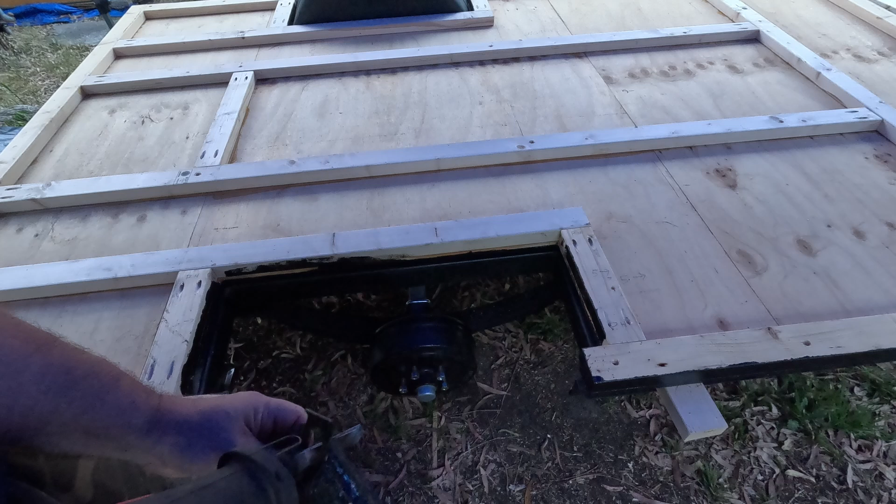Might not be as easy. Yeah, I really don't need these to be waterproof anyway. I don't need to totally seal them up because I'm building a box around them and the inside of the box is going to be waterproof.

And I have allowed for 270, which is well above the wheel well, so it should fit together nicely. Also, I marked on this bit of wood how high the wheel is once it's in, and we know it fits in that hole, so that's definitely big enough to be fitting in there.

And yeah, pretty much once it's all buttoned up, I should be able to fix those seams there, and water should stop getting in anyway, so that'll be good. It'll be awesome. Oh, it's getting windy and the storm's brewing up.

Did what I wanted to do, and that's all I wanted to do, was just get those wheel wells on and just have a look at it, get the base flipped while there's someone else around to help me, so I wasn't scratching the crap out of it while I was trying to get it up there.

Yeah, so up until now I haven't really thought about how all this stuff goes together, so I did quite a bit of design work last night, and I might take you through it now.

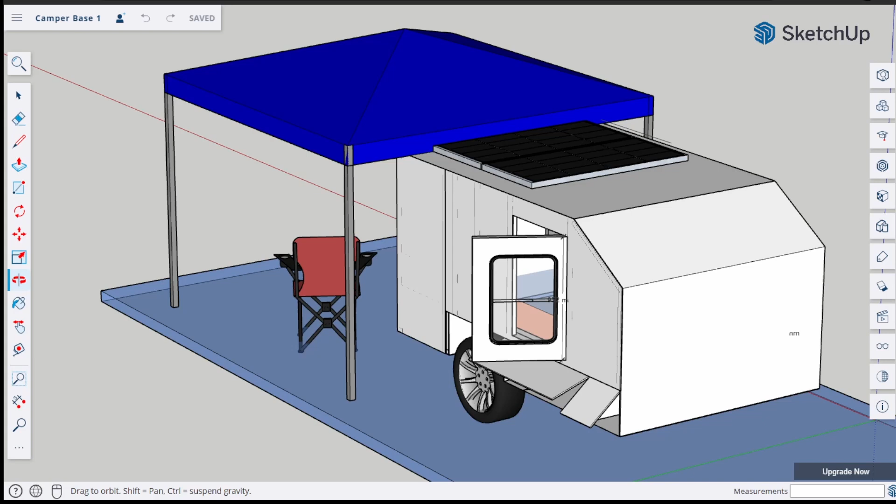So here's the sort of first concept drawing I came up with. It's your typical square drop shape with solar panels on the roof and a window in the door, and a bit of storage underneath. I just really wanted to work out what I wanted in a camper and how it all fit in there, so the whole pass-through on this area here, and also the storage underneath. It should all look familiar from everything I've done so far.

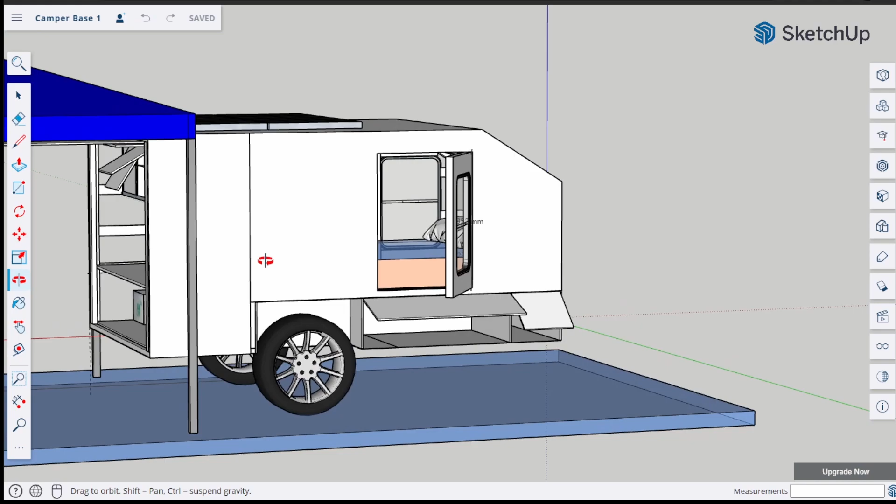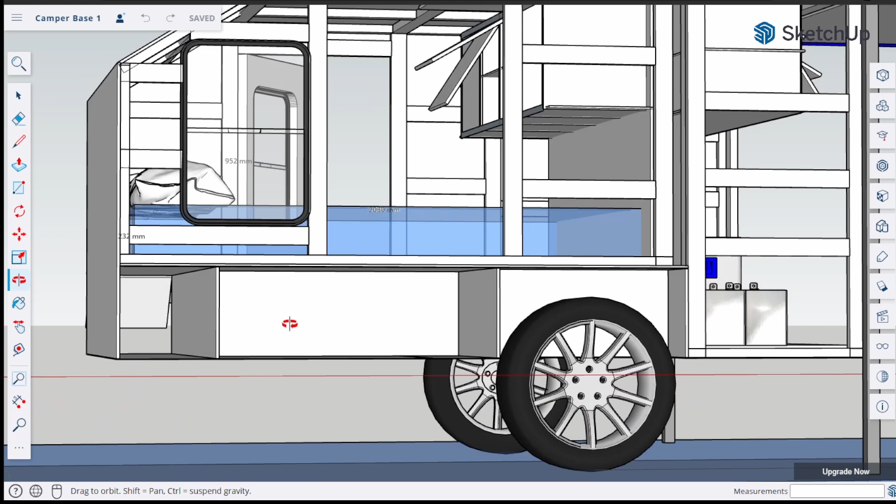Also, the rear area with the fridge and batteries - I don't really know where I'm going to put everything, some cabinetry, that sort of thing. It's some really minor detail of how all the framing is going to go together, but you can see that underneath it's plywood. There's no actual structure under there, no rigidity, no thought of how it's all going to go together - it's just a concept.

So here is the more detailed framing. As you can see, there's a lot more involved than what I had before, but it's still all the same elements, really.

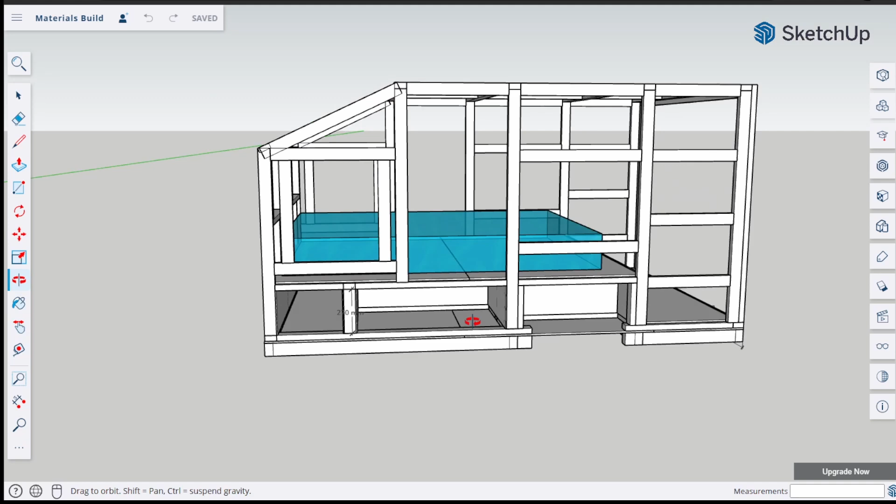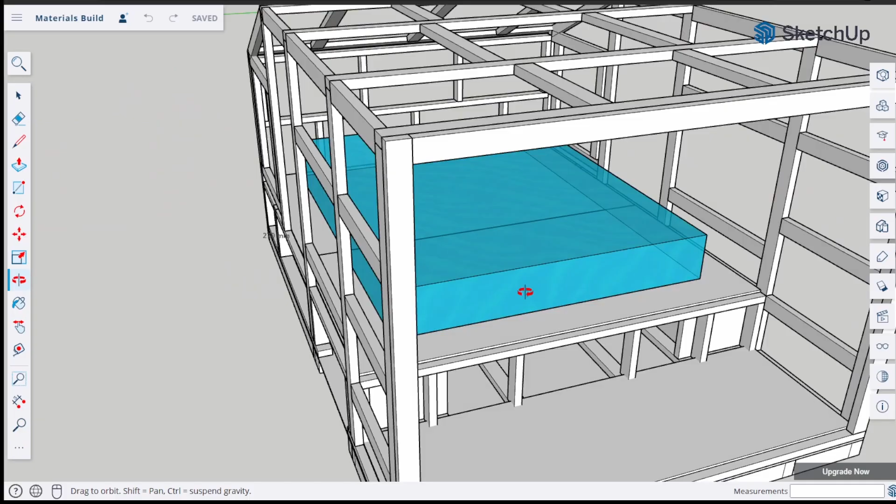So the pass through here, the storage area underneath, the wheel wells, and the kitchen area at the back. You can actually see from this view how much storage there will be underneath - how much of that is going to be accessible with the fridge in the way, I don't know, but we'll work it out. And the scale of the interior with the bed there, you can see how much room there's going to be.

So I'm still working on the finer details of the inside, but as for putting the structure together, this is what I've come up with.

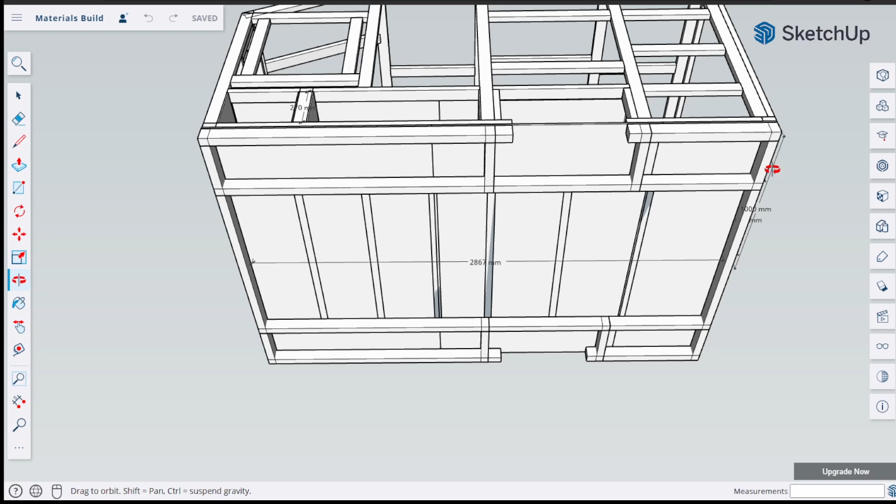I started by modelling the complete frame of the trailer underneath. So that's the trailer, and then the thin line there is the plywood that's on there, and you should see the familiar rails that I put on there.

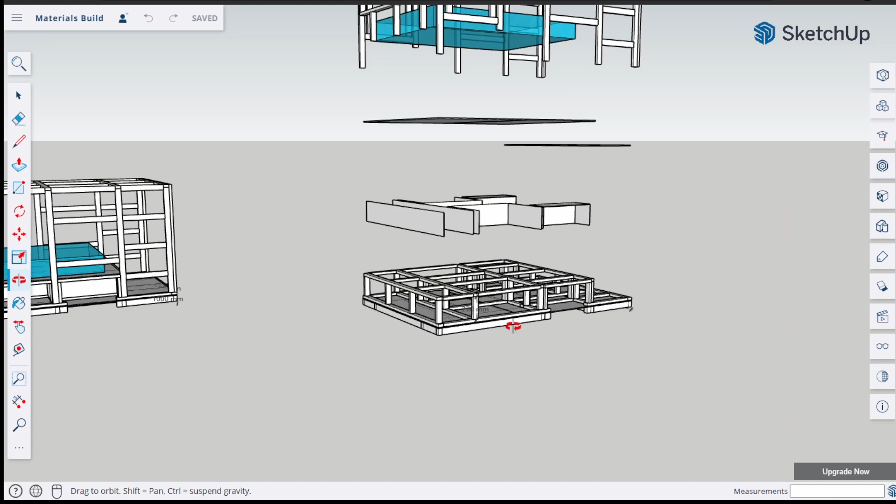So from that I expanded it just a little bit so we can see it in more detail. This is sort of what I came up with, and I don't know if it's overkill, but I do want it to be solid because I want it to last for a long time and not shake itself apart when I'm driving down the road.

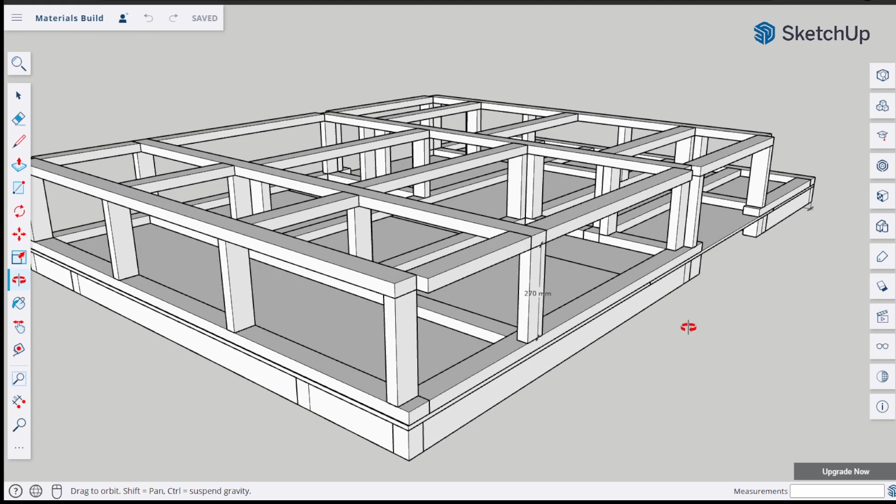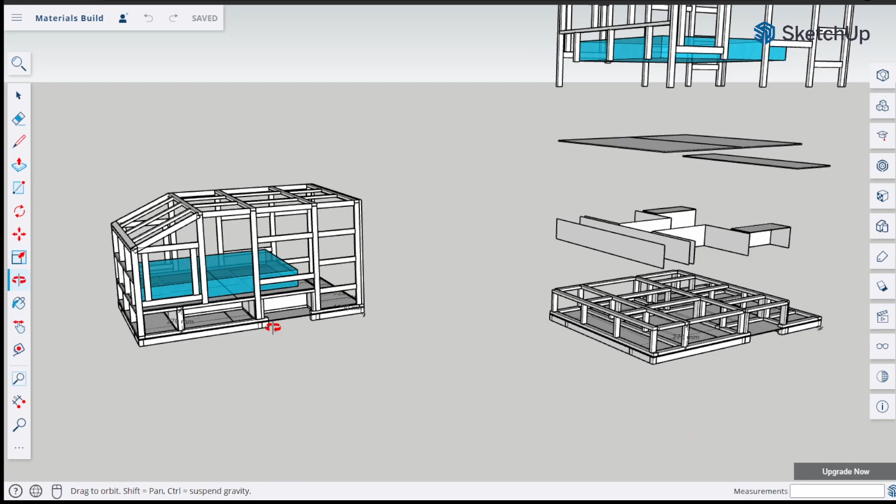What you might notice here is these uprights are missing here, also here, and at the back. Because what I was actually planning on doing is, in the top part of it, having the uprights for the most part running all the way down to the floor and attached, so that all of the structure that's built will be solid and together, if that makes any sense.

This is a materials breakdown of what I'm going to be using, and sort of a map. Not 100% sure yet how it's all going to go together, but sort of a map of how things will connect together.

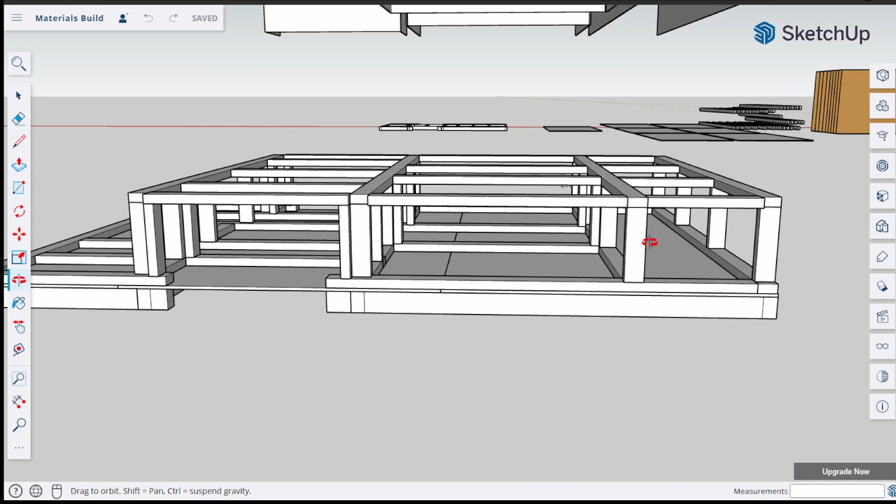So this is what I'm going to be working off, and you can see right here that 270 upright is what I've been working off between the top and bottom of the storage area. So that's what we got.

I've actually got a plan. So I'm going to probably start cutting all the bits of wood for it, and then laying it all out, mocking it all up first, making sure I've got the right amount of wood, because once I start building this thing I'm not going to have the trailer to go and get the wood with, unfortunately. Maybe it'll fit my car - I have to test that. That's what I was going to do, I'm going to do that now.

Technically it fits in my car. Might be a problem with it sliding forward and hitting the windscreen. So yeah, next video is going to be cutting up all the wood to build the storage area and the bed base.

It's going to get confusing, but I'm going to power through it. It's going to work. It's going to be fine. It's going to be good. It'll be alright, I hope. Maybe.

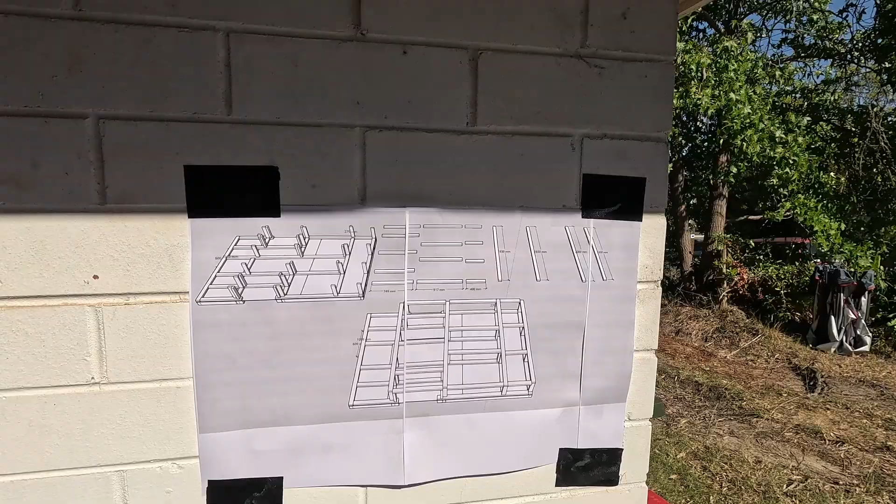So it's now Saturday morning, bright and early, and we're going to start cutting some wood to get all this done. I did make a cut list, so let's have a look at that real quick. I do have a plan here with some measurements on it, which I'm going to use. First of all, I'm going to get a tape measure and just double check that the measurements correspond to this, and then I'm just going to get cutting.

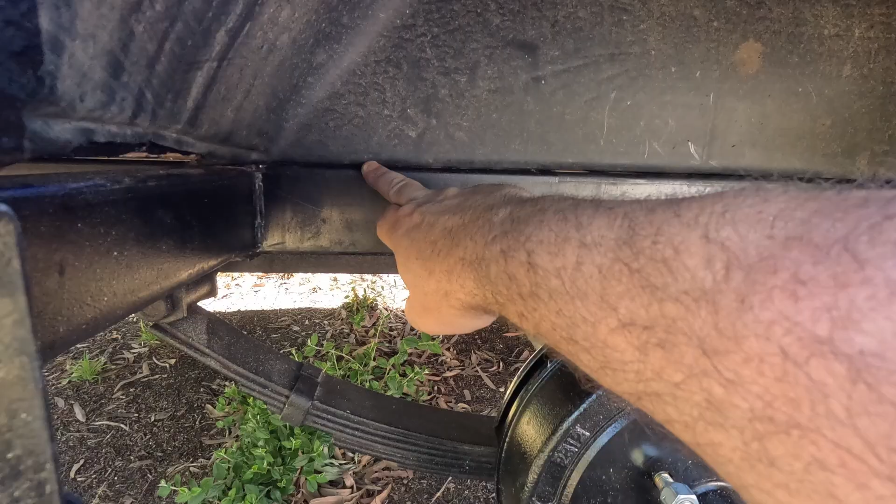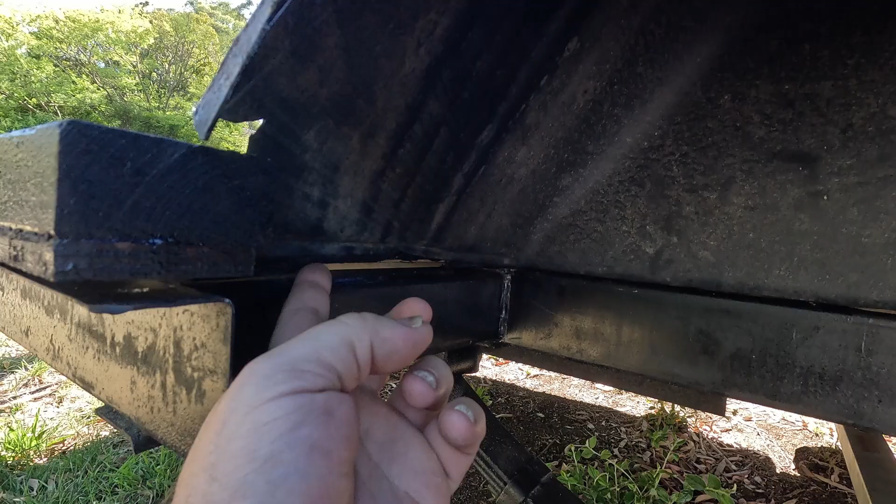Also, I have totally changed my mind on these guards. The lip is actually causing quite a bit of gap, and I'm worried that it's going to throw all the measurements out. So I'm going to be taking it off, and all these parts that are supposed to be going under between the frame and the ply, I'm going to bend down and actually mount along the frame on the inside of the wheel well. So the base will actually fit flat, because as you can see here, it's creating quite a gap, and I think I should have tried to avoid that at all costs. Also trying to work out a way to make repeatable cuts.

And I think that ought to do it. That's actually, yeah, something like that anyway. So having never done this before, I'm actually thinking the best way to do it would be...

...to cut the long bits first and then use the offcuts, graduating down to the smallest. Because in my mind, if I just get one bit and cut it up into lots of little sections, I'm just going to be wasting wood. I should be using offcuts.

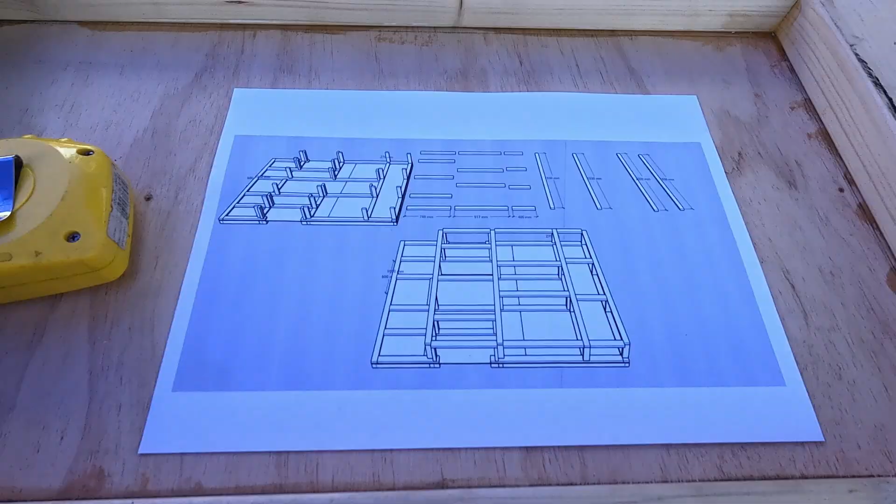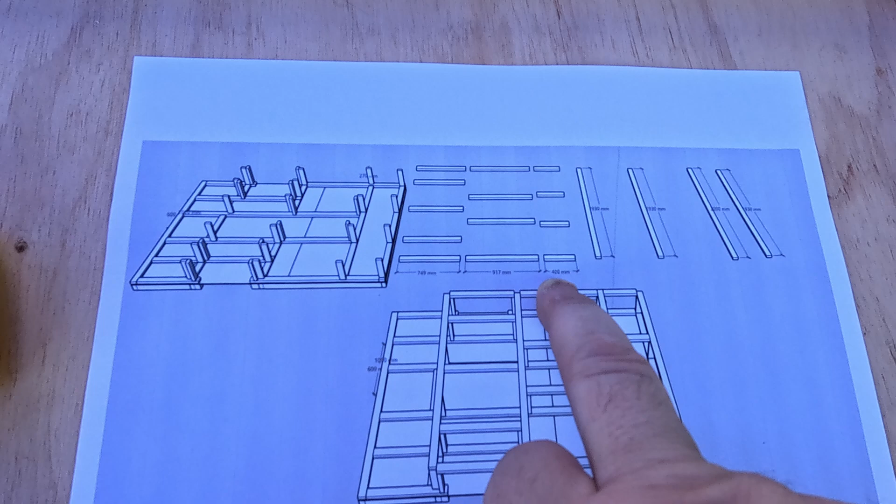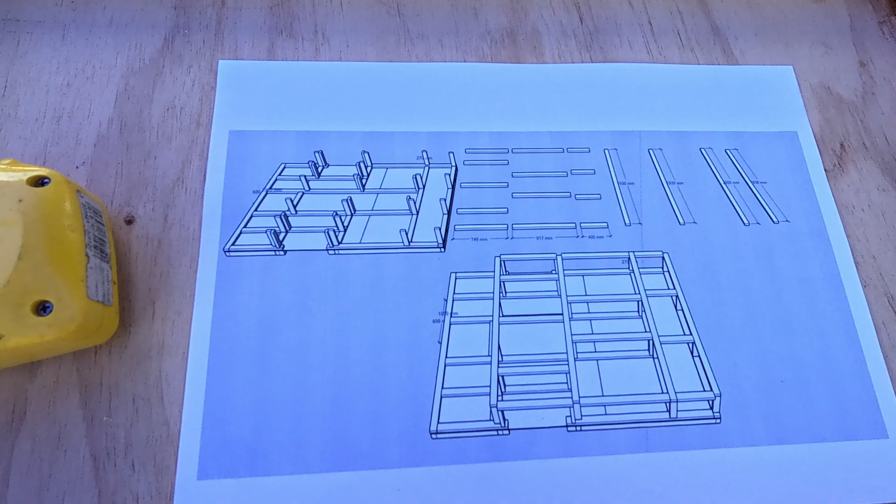So I think the way it works in my mind is if I cut all the large ones, they're 1930, it's a 2000, 1930. If I cut all those and then start doing the ones that go along, because I think they're less than, we've got 1, 2, maybe 2.2 meters or so for these long ones along this direction, and then end up doing the 32 smaller ones, which are 270. So yeah, start with the biggest ones first and then use offcuts for all this stuff from there and see how far we get, and Bob's your uncle, I guess.

Well, this is why we double check measurements, especially when you're dyslexic, because 1390 is a lot different to 1930, indeed. So yeah, double checked, crisis averted.

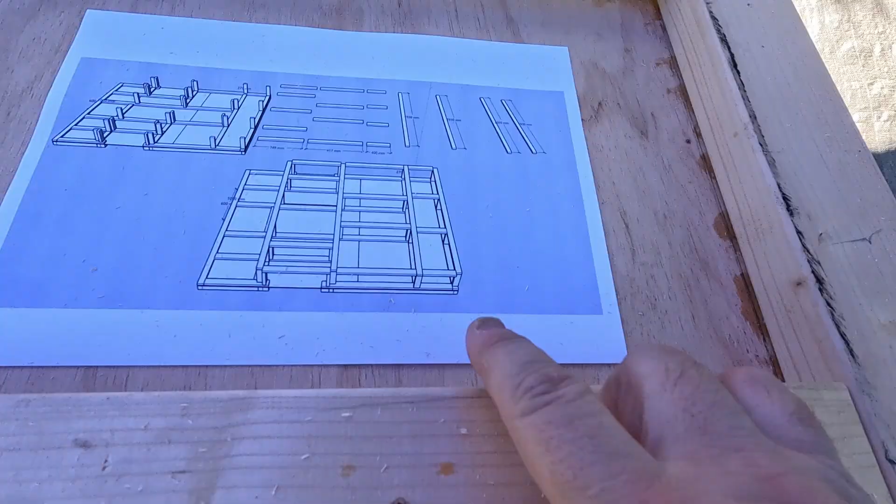Yeah, so from my drawing on the front and these two bits in here, I need what is it, 35 width to have the upright coming up from there, so they're 1930. So yeah, just a sanity check that.

Fit this guy in there. Yes. Guy's flush in there, so that's what I'm after.

I'm going to carry on with this, and there's just going to be a whole lot of measuring, cutting and fitting, and while I'm doing that, you might as well listen to some music.

Oh! Oh, wow! Yeah! Music! Do you remember when we were young? Everything was just for fun. I guess you thought it was all wrapped up for you. Wasting time just to get away, till we had nothing left to say. And all those eyes that we knew were almost true. Dreaming of what was meant to be, living life unexpectedly. This was something we all could hold on to.

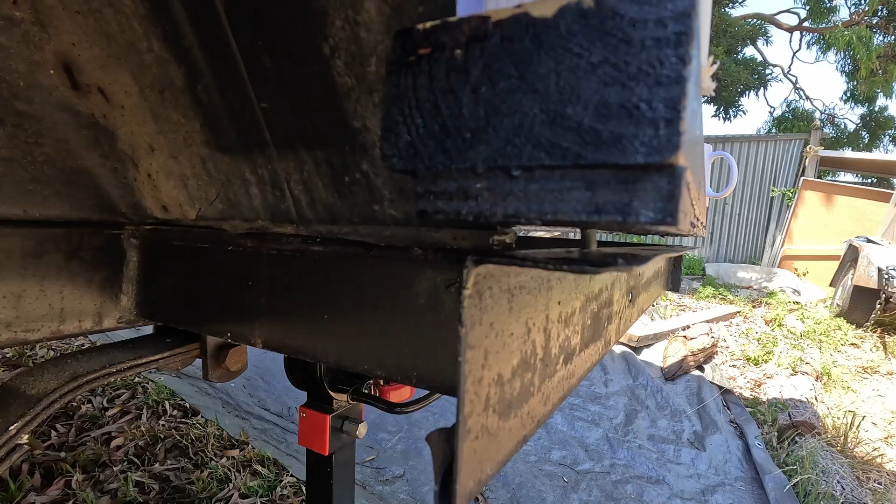I thought I was cutting them bad, but I don't think so. I think what's happened is, like what I was explaining earlier, when I've got these guards and they're sitting between the frame and the plywood. See, that's the sort of gap it makes over here, and if that's raising it up here, then I should probably expect that sort of gap in the middle. Yeah, I'm gonna have to take those guards out, and I can't do it without dismantling all this stuff.

So yeah, this will be interesting. Also, it's after 1 o'clock in the afternoon and it's way too hot to be outdoors. I think we're heading for like 30s, mid-30s today, so I'm going to pack up and go inside.